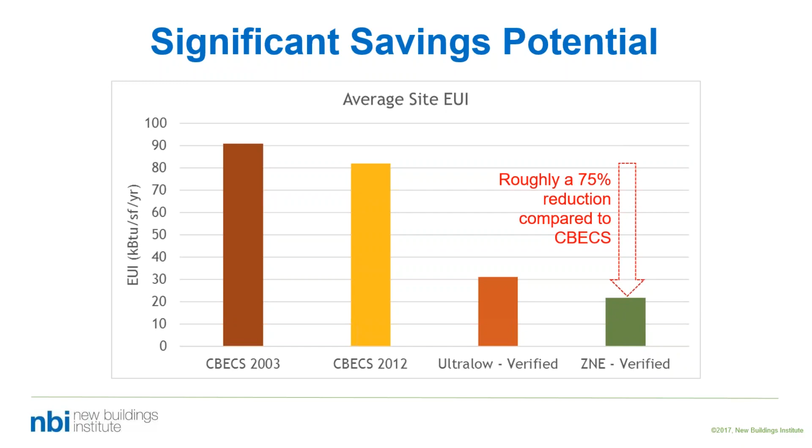Tracking the ZNE buildings across North America and in the United States, we see evidence of buildings in every climate zone. We are tracking 45 states and provinces in North America that have ZNE buildings.

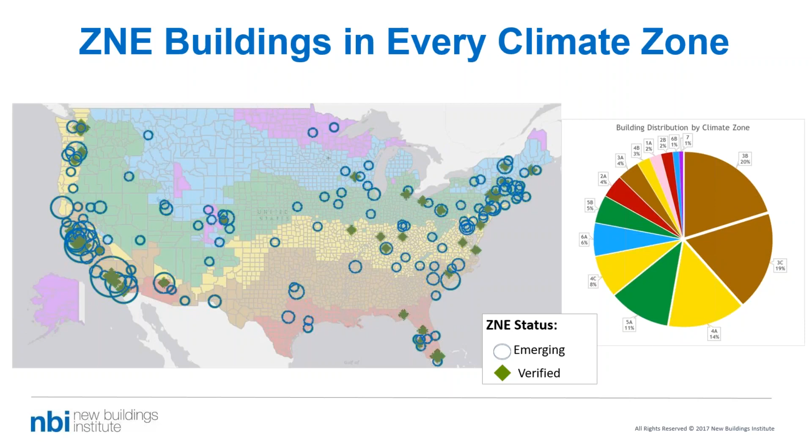We also recognize that public sector adoption of ZNE is really significant, but there's also been growth in the private sector, and 30% of the buildings we're tracking are private for-profit developments.

The education sector is really significant as well — 38% of the buildings we're tracking are in the education sector. You can also see that office and multifamily are significant.

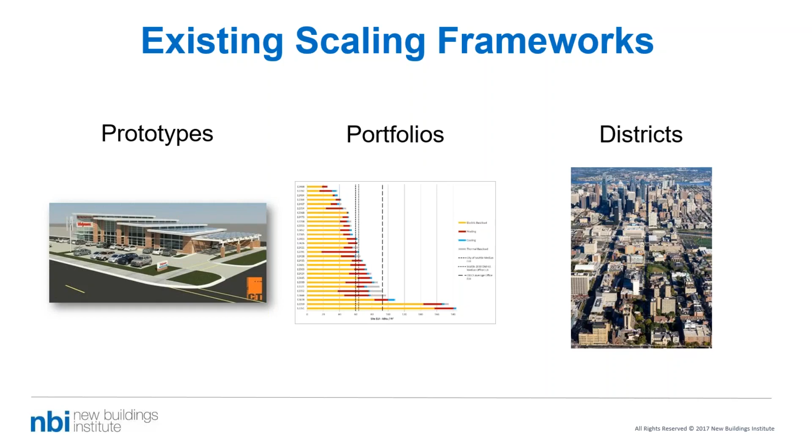When we think about scaling ZNE and the session we're talking about today — planning for districts and urban environments — we see that districts are a key component of scaling ZNE. We've been looking at different scaling frameworks like prototypes, portfolios, and districts, and we see that this is a key element of scaling ZNE.

We also recognize in the work that we're doing that codes and policy are really heading on a pathway to zero. Whether it's in Oregon, California, Vancouver British Columbia, Washington, or New York, there is a defined pathway to zero, and I think our panelists will cover that as well.

You can have access to resources related to ZNE at newbuildings.org. We have an entire hub of information that you can leverage, plus many different resources we can point you to.

The two books of case studies that are put out by Pacific Gas and Electric. We also have case studies developed by NBI for the California Public Utilities Commission, and of course our database and registry. We can also have you added to our ZNE Action Bulletin, an annual publication of news items that you can look forward to catching up on.

So we would be happy to support your efforts and empower your team to get to zero through trainings, planning tools, tours, workshops, and other supportive services.

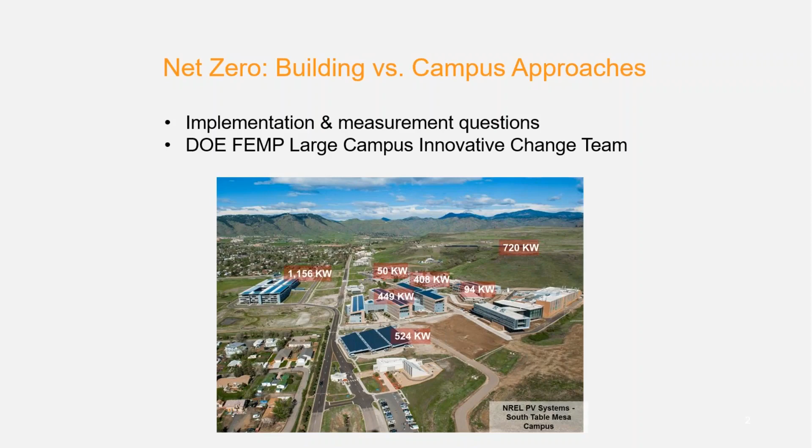But it's actually grounded in security considerations - energy security, water security, very serious concerns about terrorism or hacking or what have you disrupting energy and water supplies. And this is the Army's response, and they have a good case to make for it. So they've really been the leader in this net zero campus approach.

Getting beyond the federal perspective, I just wanted to give a little broad picture on net zero at the campus level to introduce what my fellow speakers are going to be talking about next. So, advantages of doing net zero at the campus level: obviously we're trying to influence these massive resource flows locally, regionally, nationally, globally, and the larger scale you're at, the more influence you have, beyond the building to a campus.

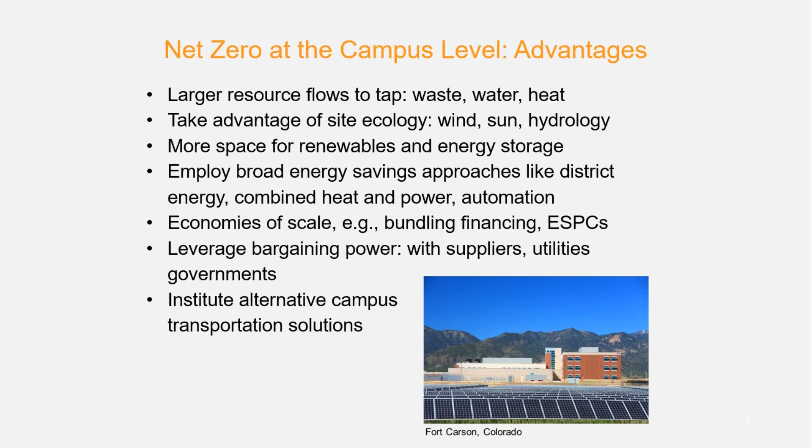In terms of some of the challenges as well. Obviously, when you're working at a bigger scale, you're a bigger target. Politically, it's easier to go against you, knock you down. And of course, planning responsibilities on the campus level are certainly greater. Financial and legal hurdles: for example, in some states, if you're seriously generating energy at a certain scale, you're legally considered a utility.

I know Rocky Mountain Institute has one project in Pittsburgh, the Almono project, a large development, where they actually took on the challenge of being an integrated energy service provider, providing all different energy services, basically like a little utility for the site. So it's an interesting model. More players, more training needed, and really making that leap from a building, which can be considered an experiment, to really doing all this work at scale.

So next slide, that's basically it for me. I just wanted to introduce these topics and then hand it over to my fellow speakers to really delve in more detail. All right, Charles, you want to go ahead and take it away?

Okay, well, thank you, Ralph. Next slide, please. Next. I want to start by just defining zero energy buildings. The U.S. Department of Energy published this report in late 2015. Next.

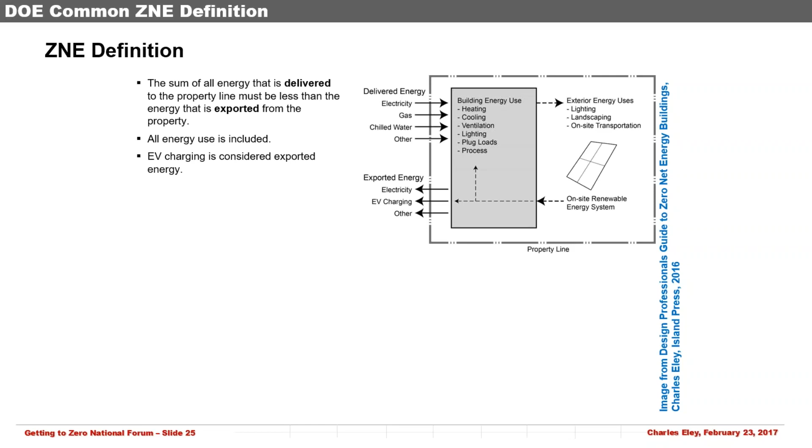One thing interesting to note is that they specifically address electric vehicle charging. If you have EV charging stations on the site and the vehicles are being charged and driven off-site, that's considered exported energy. So it doesn't count against you in trying to achieve ZNE. Next slide. Next.

So the concept of ZNE, the boundary, can be broadened to include a campus. A campus is a group of buildings on a contiguous site, and instead of looking at the energy accounting for individual buildings, you look at energy accounting for the entire campus.

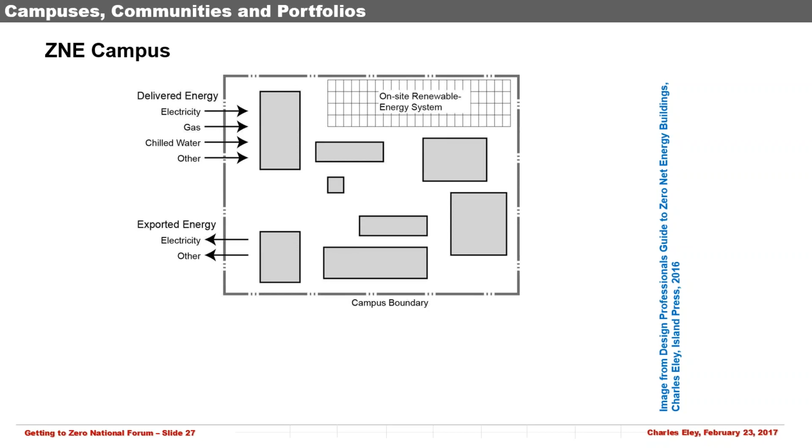I did some teaching at Foothill College just south of San Francisco a couple of years ago, and they have a 2 megawatt PV system over the student parking that serves all the buildings on campus. Individual buildings don't have their own renewable energy systems or solar collectors. They have one large system for the whole campus. So the ZNE test is the same, except the boundary is broadened. Next slide.

The ZNE test can also be applied to communities, and these don't have to be contiguous. A community could be a homeowners association or a business. There's various ways, and you can have one large source of renewable energy that supplies multiple buildings within this community. But again, the test is that the delivered energy to the community should be less than or equal to the energy exported from the community. Next slide, please.

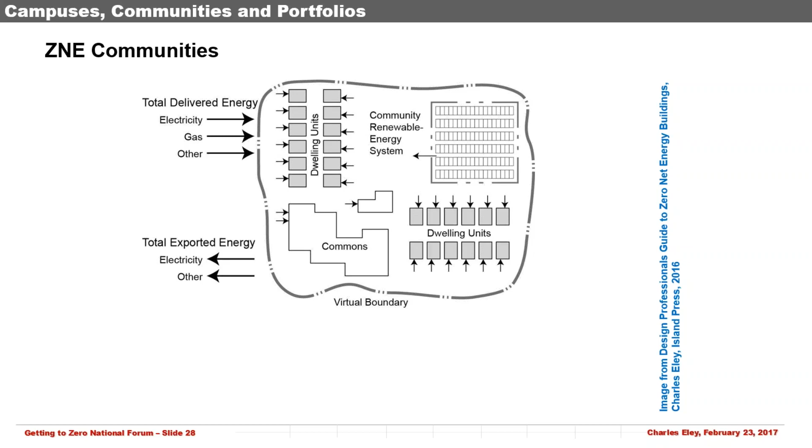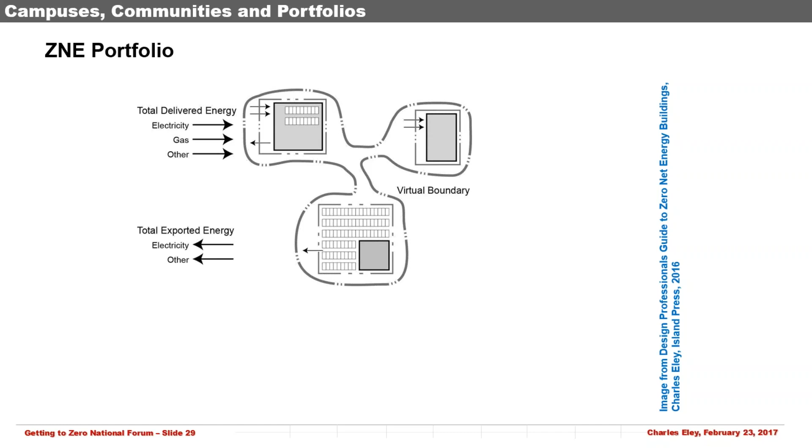And then the final concept I want to talk about is a portfolio. A portfolio could be a school district, or a business that's managing multiple offices. And this, again, is a virtual ZNE boundary. The buildings don't have to be contiguous. You look at the total energy delivered to this portfolio, compare it to the total energy exported from the portfolio, and apply the ZNE test in this way. Next slide.

School districts, as I mentioned, are a good example of this. These are the schools located within the Dry Creek Elementary School District, just east of Sacramento. Some of these sites have the potential for a lot of renewable energy. Some sites have less potential. So when you group them all together, it makes the job of achieving ZNE at the portfolio level much easier. Next slide.

I want to talk about some challenging building types, and the concept I'm going to be using here is what I call the collector area to floor area ratio. So if you needed a ratio of 0.33 to achieve ZNE, you'd need to have PVs on 1/3 of the roof of a 1-story building, 2/3 of a 2-story, and the entire roof of a 3-story building. Next slide.

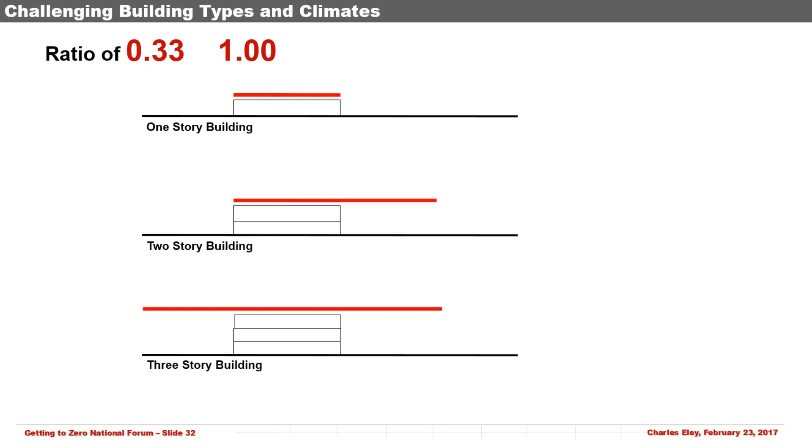If it's 50%, then it's obviously more PV per square foot of floor area. Next slide. And when you get to a ratio of 1, then it's challenging for sure. Next slide.

So what I did is I looked at some typical building types and some typical climates. The climates are shown across the top and building types on the left side. And the numbers in this table represent the collector to floor area ratio that's needed to achieve ZNE. And this is when the building itself is designed to maximum technical potential in terms of its energy efficiency. So all of these buildings would be in the ultra-low energy use category that Ralph DiNola was talking about earlier in the NBI list. Next.

So the yellow line here, everything above the yellow line, ZNE would be feasible for one-story buildings. Below the yellow line, you would need PV in the parking area or in other areas on the site. Next. And this is the delineation for two-story buildings. If above the line, ZNE would be feasible for two-story buildings. Next.

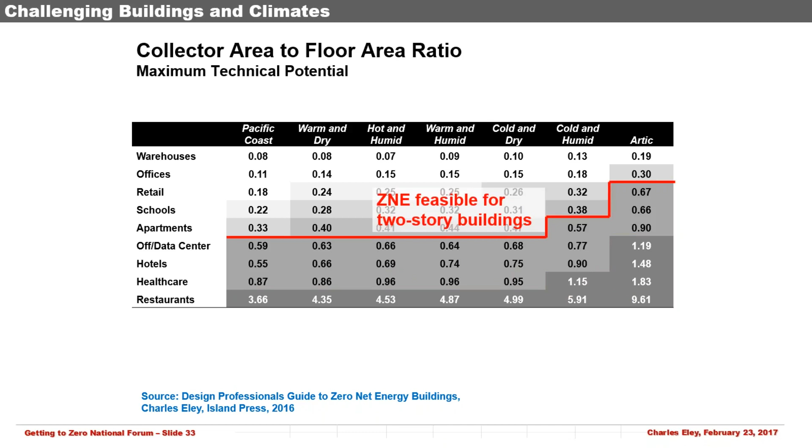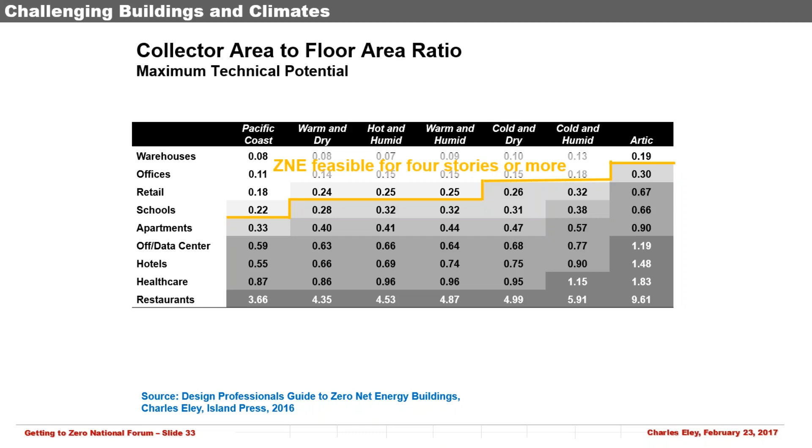And finally, for 4 or more story buildings. So you can see that schools, retail, offices, warehouses present many fewer challenges, and the biggest challenges are for the energy-intensive buildings like restaurants for sure, healthcare, hotels, but also supermarkets, which aren't shown here, are also very energy-intensive and would present some challenges. Next slide. Next.

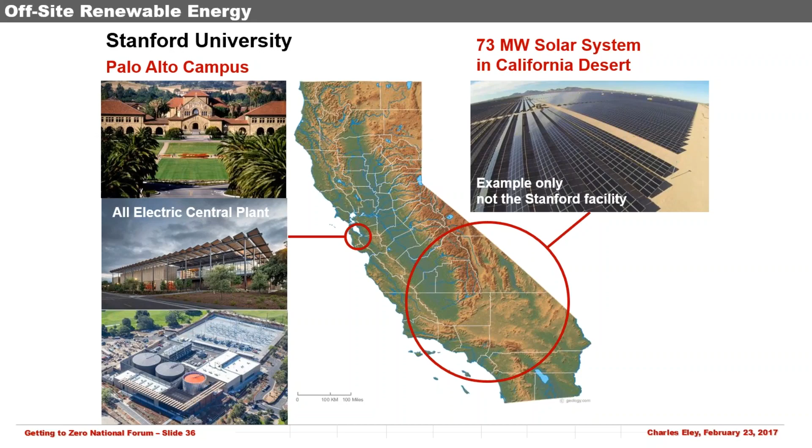So tall buildings are clearly a challenge, and there are some off-site options. Stanford University is a good example. They have upgraded their central plant to be all electric, and it produces chilled water and hot water for all of the campus buildings. Rather than put solar collectors on the mission-style architecture that's characteristic of the campus, Stanford chose to build a 73-megawatt system in the California desert. So they're pumping electricity into the grid in one place and taking it out in Palo Alto. So this is an example of a wholly owned off-site renewable energy system. Next slide. Next.

You know, Stanford is a special case. They have a very large endowment and certainly a lot of expertise. Not all of us can invest in solar plants in the California desert, but community solar is a concept that is accessible to almost all of us. One of the first examples was SolarShares with SMUD, the Sacramento Municipal Utility District, and I'm actually in Sacramento today. With SolarShares, anyone, including renters, can purchase or subscribe to enough PV to achieve ZNE.

So let's say you need 4 kW or 3 kW of PV to achieve ZNE. You subscribe to SolarShares, and the production from those PV panels that you've leased gets credited to your electric bill just the same as if those panels were located on your roof. So it's an interesting concept. Next. It's a concept that the electric utilities are pushing. Next.

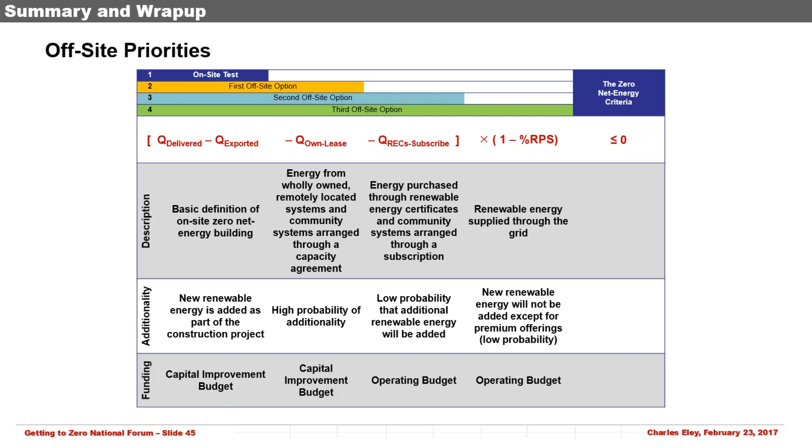And then the last option would be to factor in the renewable energy that's already in the grid. Until this reaches 100%, and this probably won't happen for a long time, you'll never get completely to zero this way, because you multiply times 1 minus the percentage of the renewable portfolio standard. And in my state of California, that's now around 25%. It'll be 30 in 3 years, and it's supposed to be 50 by 2030. But it's still not 100%. It would need to be 100% before you could get to zero net. Next slide.

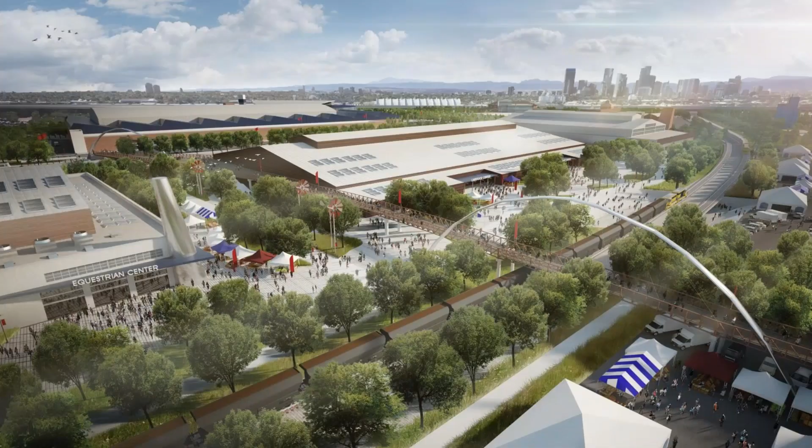Thank you, Ralph. So I'm going to talk a little bit about the National Western Center. You can actually skip 2 slides to slide 3. And I'd like to introduce everybody to the National Western Center, exactly what it is, and discuss what our current plan or strategies are for achieving zero net energy on our campus, and why we're looking to achieve zero net energy on our campus. Next slide.

So a little bit about the National Western Center. The National Western Center is a redevelopment project of an existing campus that houses the National Western Stock Show, which is a conference or an event that happens every January, 3 weeks in January, and has been going on for 110 years, which is essentially a showcase of livestock and equestrian activities, and it is the home for significant commercial activity, transactions within agriculture, specifically the livestock market. And the campus is in the northeast quadrant of the city of Denver and has been there for 110 years. And we are pursuing the redevelopment of that campus and expansion of that campus.

It is an event, if you go to the next slide please, an event that attracts close to 700,000 people and has over the last 3 years. It happens every January, and our numbers for January were very consistent with 2015 and 2016. Our hope is in the redeveloped campus that we grow that number significantly to 1 million or more, but it's an event that takes place every year and is fairly significant for the state of Colorado and for the American West. Next slide, please.

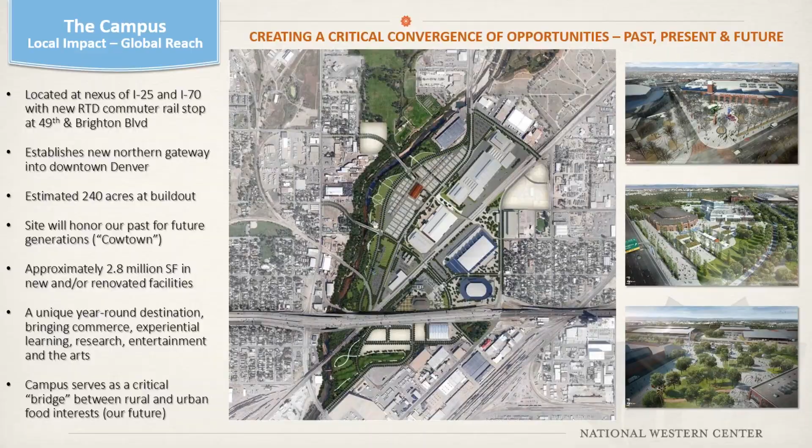So the development of the campus is outlined within the master plan as 8 phases of development over the next 20 years. The orange and red circles indicate what we will be pursuing in Phase 1 and Phase 2, and that is currently what we are funded to do.

So we received funding through multiple sources through the balance of 2015 that fund the first 2 phases of development, which, as you can see there, is a significant portion of the campus, and replaces most of the existing facilities that National Western Stock Show utilizes in January with brand new facilities that meet the growing needs for the stock show every year, as well as providing for these future uses and bringing Colorado State University into the campus with 3 facilities that help address that critical mission of the campus. Next slide.

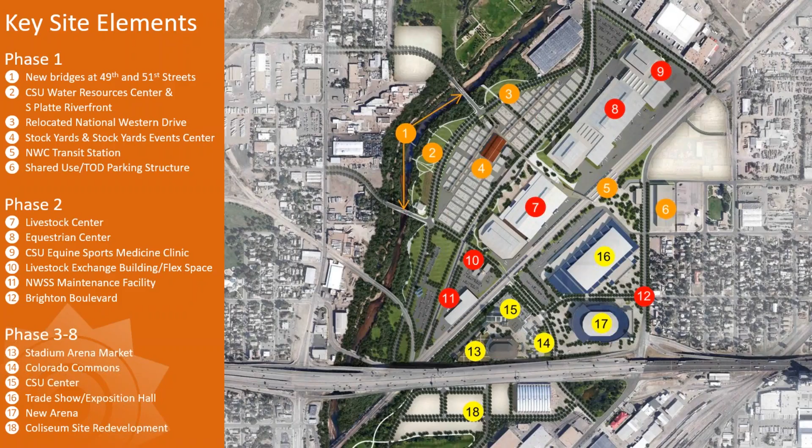And focusing just on net zero energy, opportunities abound within the campus. Opportunities for solar, geothermal, cogen, sewer heat recovery, potentially wind, waste to energy, waste to fuel. All of these are options that we will be exploring within the context of understanding how these technologies may be utilized at the campus to address the demand needs for the campus, and also being very sensitive to the neighborhoods within which this campus sits. Next slide.

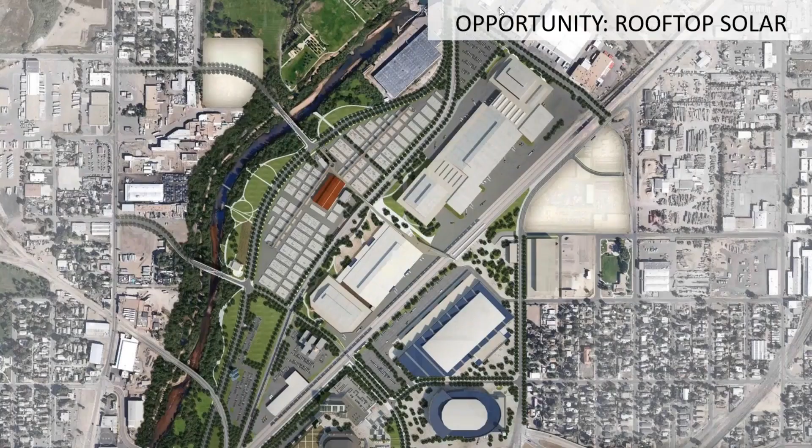Next slide, please. Yeah, so within this, the campus actually sits nestled among the Globeville, Elyria, and Swansea neighborhoods. So the technologies that we pursue will be technologies that are consistent with the desires and concerns of the surrounding neighborhoods. But when it comes to solar, the opportunity is tremendous.

We have within the overall campus at full build-out, north of 1.5 million square feet of potential rooftop for solar within the campus. The equestrian facility that you see at the north, the livestock facility in the center, the water resources center, as well as the maintenance facility, and the TOD on the right, all of those are facilities that will be built in the funded Phase 1 and Phase 2 of this campus build-out. So the opportunities for solar are significant. Next slide.

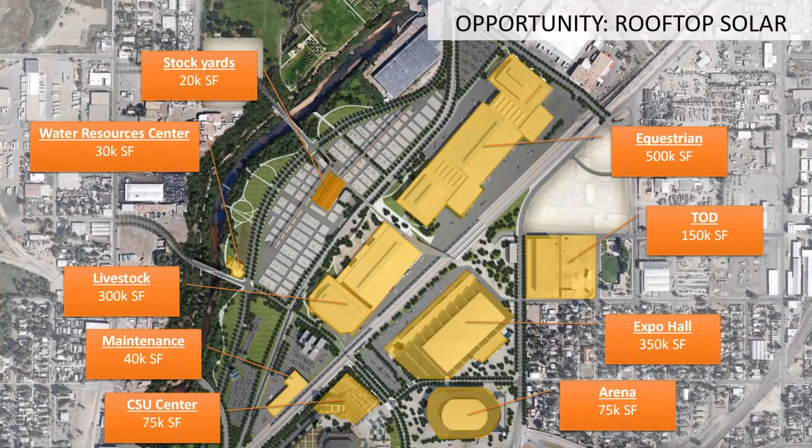Additionally, we are exploring an opportunity for sewer heat recovery. Along the western boundary of the campus run the Delgany Interceptor sewer pipes, a 72-inch and a 78-inch sewer pipe that transfer 45 million gallons per day of wastewater up to the Metro Wastewater Reclamation District's facility 1.5 miles to the north of our campus. And Metro, the operator of the pipes, has a 4-degree centigrade temperature problem at their facility. The effluent that they are pumping back into the river is 4 degrees too warm.

And so we are exploring, in partnership with Metro, the opportunity to capture the heat that is in those 45 million gallons per day and potentially reuse that heat to heat our campus, not only the buildings, but potentially snow melt for much of the grounds.

If you can imagine, the stock show happens for 3 weeks in January every year, and operationally, if we had the stockyards, which are going to be 20 acres of open space open to the outdoors, if we did not have to be shoveling snow during those 3 weeks in January, the operational impact of that would be tremendous for the National Western Stock Show. So this is an opportunity that we see. If it is technically feasible, we see some real opportunity with sewer heat recovery. Next slide.

So Charles talked about the opportunities within campus, and I think campus scale of this 240-acre build-out provides some real opportunities for achieving zero net energy, enabling us to balance some of the high demand times during the year with just simply the sheer scale of the campus and our ability to provide rooftop solar or sewer heat recovery. Having a university partner with Colorado State University is just a fantastic opportunity for us to explore cutting-edge technologies. The operational efficiency of managing a large campus that will be built from the ground up is a great opportunity for us.

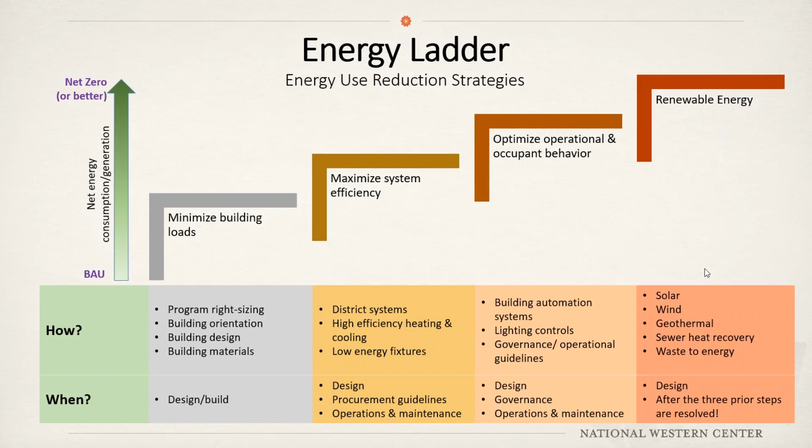So where are we in the process? We are knee-deep in land acquisition and rail consolidation and expanding the campus. We have a lot of land we have to buy, and we have to move a railroad, which will take a fair amount of time. We have ongoing environmental work, but the preliminary planning studies is really what we're knee-deep on.

We're knee-deep on the preliminary and planning studies. Within those preliminary planning studies, it's really taking our master plan to the next level. Our campus placemaking study is going to be launching very soon, and we call that our master plan version 2.0.

Hopefully we'll marry that with a concurrent regeneration feasibility study. We have an ongoing analysis of parking and mobility on the campus, exactly how do we address the mobility needs on the campus, making sure that we can keep the patrons separate from the operations from a safety perspective, and then also an ongoing economic feasibility study and kind of a search for co-development opportunities within the campus. What additional square footage can we bring to the campus to support the mission of the overall campus?

So the regeneration feasibility studies which follow the screening analyses must work very much in concert with the other primary studies that we're doing.

The campus placemaking study is working concurrently with the regeneration feasibility study. In campus placemaking, we will be refining our program. As we refine that program, we must feed the details into the net zero study to inform the demand modeling we're doing in that regeneration feasibility study, and then feed the district infrastructure recommendations back into the public realm study. For example, if we're going to have a central plant, which seems likely if we pursue district infrastructure strategies, we need to find a location and ensure it works well with the overall program for the campus.

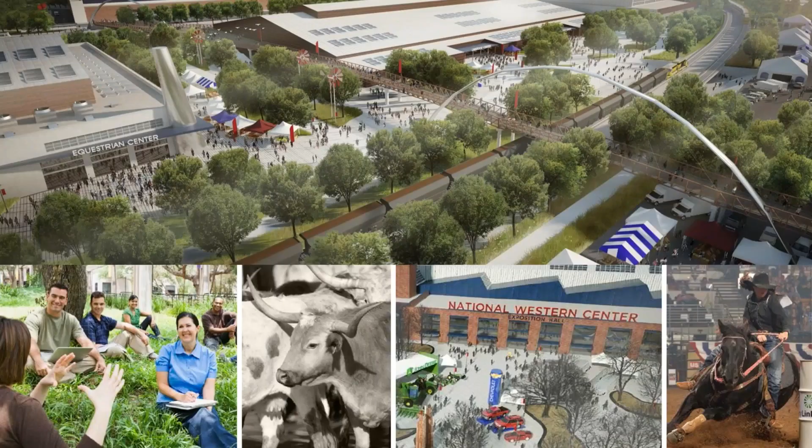Similarly, there must be collaboration between the regeneration feasibility study team and our parking and mobility study team, sharing greenhouse gas and carbon footprint data, feeding parking requirements developed in the parking mobility study into the regeneration feasibility study, so we can understand if there's potentially additional square footage for solar, for example, if we're adding more parking, or if we're reducing parking from the master plan. All of that needs to be considered in pursuing our regeneration strategy.